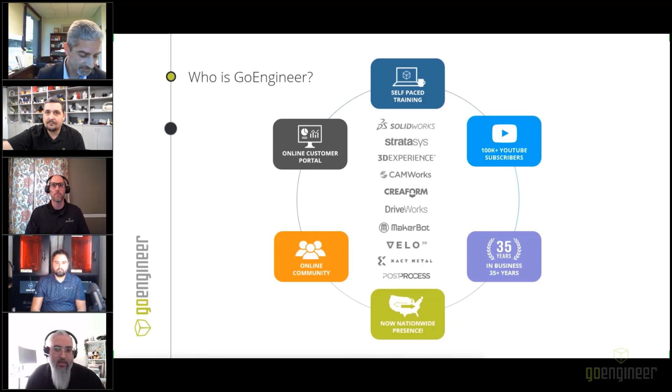GoEngineer is really coast to coast across Canada and the US. We have over 40 offices, 125 certified technicians, and for dental labs where production is your number one priority, we can be your edge against your competition.

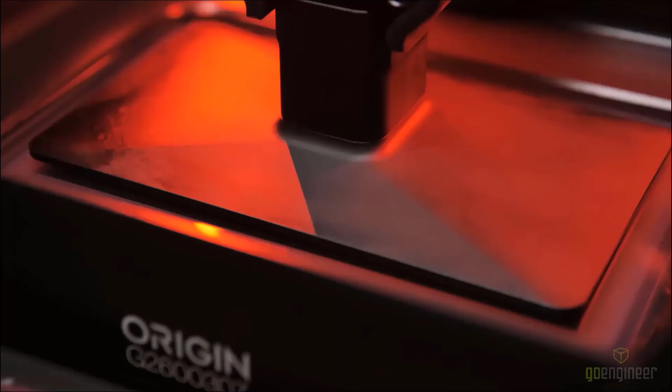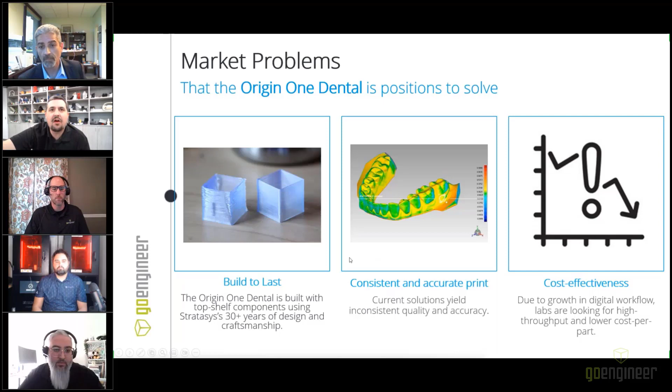Let's first look at this through the view of the problem statement and value propositions we're trying to approach with the Origin One Dental system. The market problems we look at today are that a lot of the systems out there typically aren't built with the same quality materials and components you'll find in a Stratasys machine. Stratasys has been leading the additive manufacturing industry in the quality of industrial 3D printers for over 30 years, and this continues with the Origin One Dental machine. We provide very consistent and accurate printing, and the goal is to have cost effectiveness not only with the machine, but with the cost per part in the dental models produced.

So what problems can the Origin One Dental help solve? Due to workflows and growth in digital workflows, labs are looking for a more cost-effective solution, and the Origin One Dental has quick print times paired with economical resins, resulting in low cost per part. Inexpensive DLP solutions produce a wood grain surface finish, like stepping in the layering. Origin One Dental has a proprietary separation process, which we'll talk about a little later, that results in a very smooth surface finish.

Inconsistent quality and accuracy with existing solutions is another issue. We have tightly controlled software which enables print processes to ensure high degrees of accuracy and part-to-part consistency. The software technology is static on a lot of the systems out there. Cloud-connected printers allow for software updates, which enables print performance improvements as you own the printer. Low-cost hardware is unreliable and not built for high-volume usage. Origin One Dental is built for industrial production with a footprint that maximizes the space.

Richard, if you could just stay on this slide real quick. These benefits we just went through, Trey is going to speak to in more detail and from a higher level of how these benefits are working through his lab. So really looking forward to hearing that from Trey.

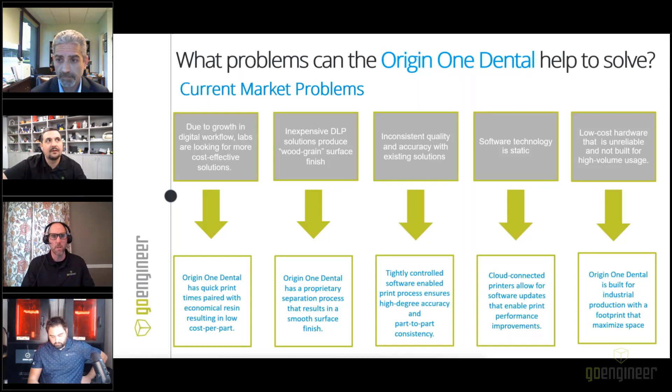Yeah, me too. Okay, so here's what the machine looks like, and you can also see it behind Trey there, a couple of them. The technology we're using is a variation on digital light processing that Stratasys refers to as programmable photopolymerization. The build volume is 7.5 by 4.25 by 14.5 inches. It's a relatively small machine compared to a lot of the other Stratasys machines on the market. You can get down to a layer thickness of approximately 25 microns. One of the nice things about this system too is that it runs on standard 110 or 220 power, nothing fancy.

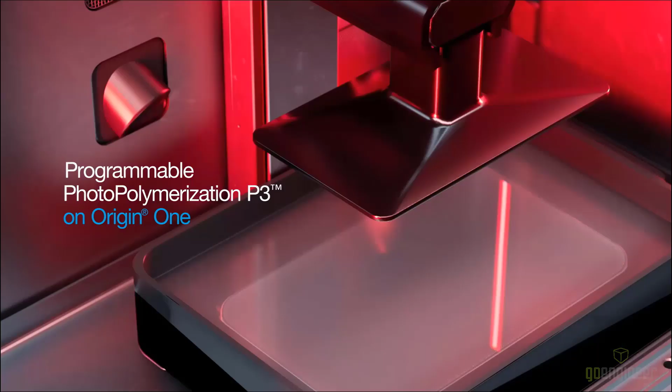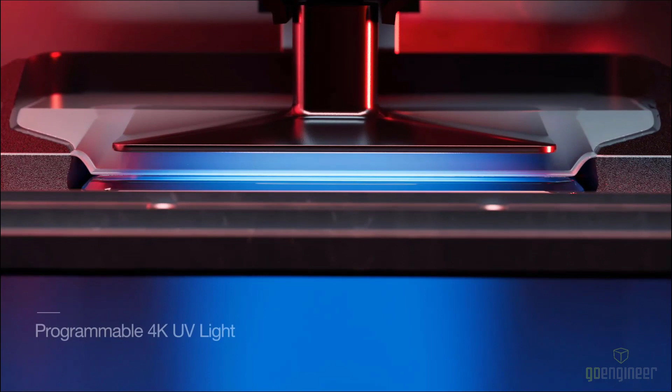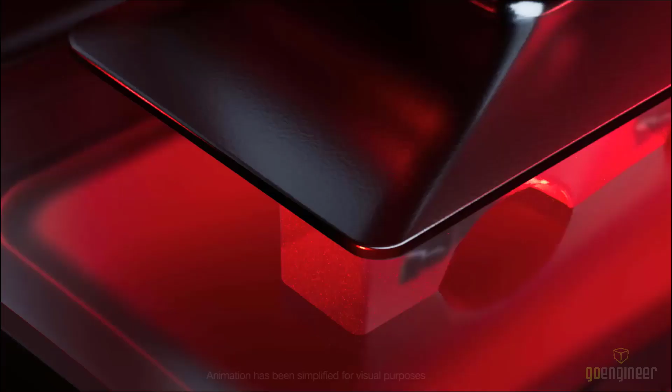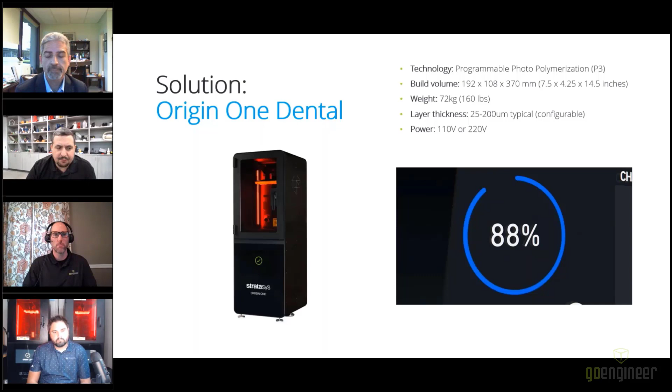And I want to show you right now the separation mechanism. The idea is that the Origin One uses a pneumatic separation mechanism. You can see that little baffle that lifted up, and that provides the ability to separate the printed model from the build sheet. In a lot of printers, that's an area that can lead to failed prints if it's not handled properly. So that is really one of the big benefits to the Origin One system.

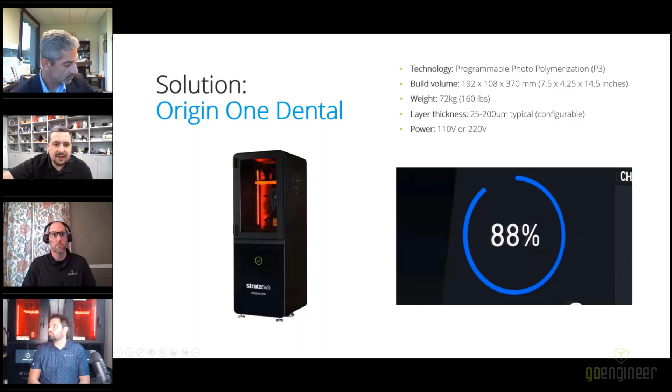So turn it back over to you. Yeah, so this is where we're going to pass it over to Ira. Again, thank you, Ira, for your support here, and really excited to have you chime in on this part of the webinar. We'd love to hear from you, share a little bit about Keystone Industries, your leading edge Keyprint 3D line of 3D resins, as well as how those resins have been integrated with the Origin One and your experiences with those.

Sure. First of all, thanks for having me today, Aaron, and the whole team, including at Stratasys, and I'm very pleased to be here and to be talking about the partnership. We've been working with the Origin One system for quite a while, even through the development of the Origin One's technology, as at the same time we were developing some of our Keyprint resins. So we've been in close touch with this printer and the folks behind it for a long period of time.

Hi, I'm Ira. I run the dental business here at Keystone.

Keystone is a manufacturing business focused primarily on two verticals, although we're in some other spaces. One is the dental space, which I'm the president of that group. And the other vertical is cosmetic nail coatings, particularly reactive nail coatings, dip powders, gel manicures. The secret between the two and why they work together is really polymer technology. While we're competent at a lot of different scientific methodologies and applications and materials, polymer chemistry is really at the very heart of what we do.

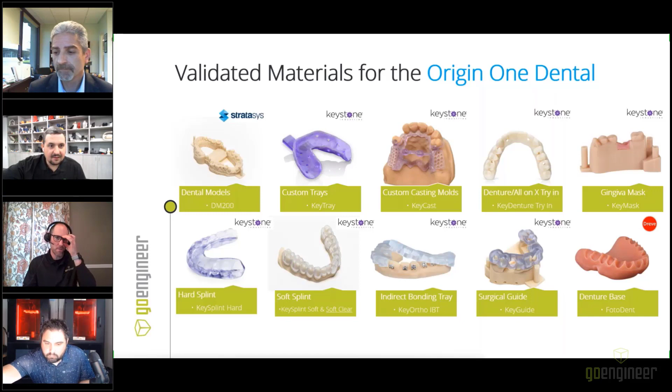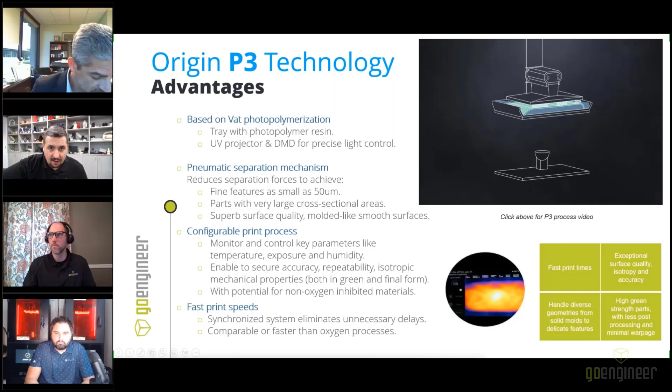Our print processes are totally configurable. You have control over all the parameters needed to validate materials on your own. We also have fast print speeds — significantly faster than what we see elsewhere on the market. If we look at the speed and number of parts the Origin One can create compared to its competitors, you can see the print time is significantly less, as well as, in some instances, the post-processing time.

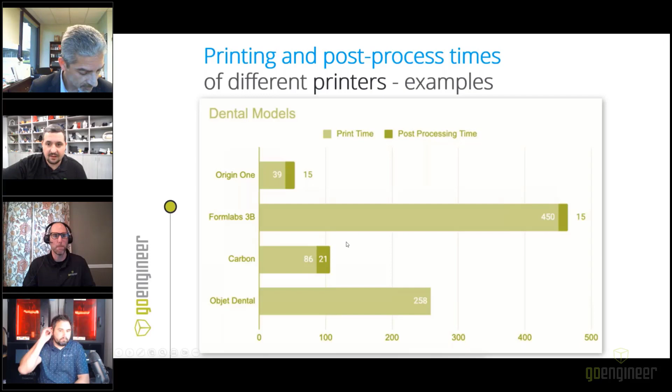With that, I'll quickly go through these slides and talk about some build trays and estimated print times possible on the Origin One Dental.

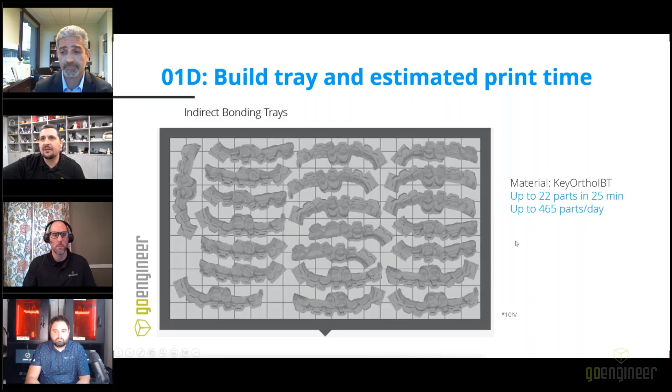Here we have a collection of indirect bonding trays, printed in Key Ortho IBT. We have up to 22 parts being printed in 25 minutes, which allows you to generate up to 465 parts per day.

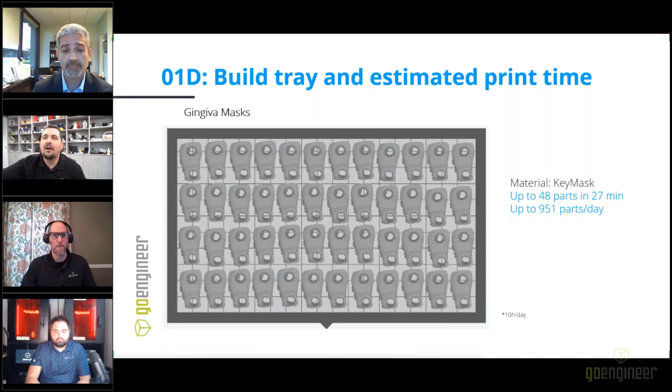Here we have some gingiva masks, with the material Key Mask. We have up to 48 parts in 27 minutes, up to 951 parts per day.

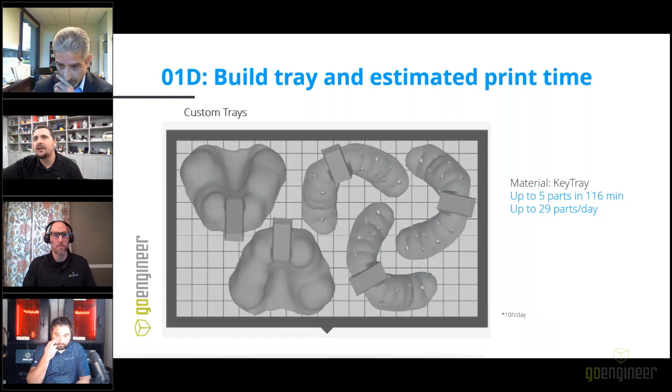We have some custom trays, with the material Key Tray. We have up to 5 parts in 116 minutes, with up to 29 parts per day.

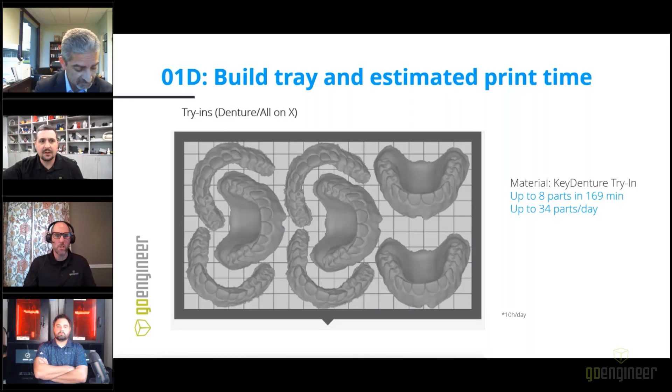RPD, print to cast. The material is Key Cast, with up to 8 parts in 37 minutes, up to 121 parts per day. And Richard, if we could just stay here, I did have one question for Ira on the castable, the Key Cast.

Historically, many of these resins, due to their makeup — I'm not a chemist, so I won't get into the nitty gritty — have primarily been indicated for RPDs for one reason or another. Some have issues with casting alloys or pressing lithium disilicates. Can you also use the Key Cast for those applications as well?

You can. It's been worked on and tested, whether it's cobalt or other metals regularly used for crowns, multi-unit prosthetics, or cast partial metals. It also presses well as a ceramic press material. Burnout is clean, whether you put it in the oven at max temp or let it ramp, with performance and no expansion of the resin into the surrounding investment material. So you get a really good, clean product from it. We've had really no complaints about how it's working, as designed, for what would traditionally be a wax-up.

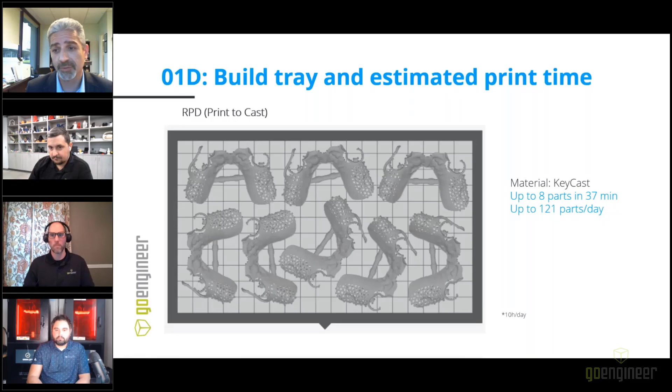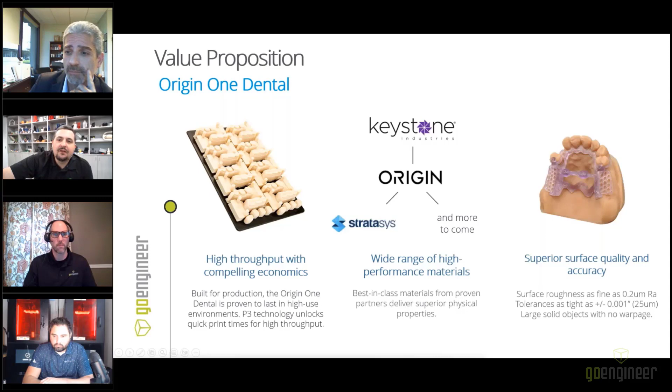The value proposition in the end for the Origin One Dental is that we have high throughput with compelling economics, a wide range of high performance materials from valued and trusted partners, industry leaders, and our machines can produce superior surface quality and accuracy. And with that, I'm going to be going to our next guest speaker.

Yeah, that's a perfect segue, Richard, for Trey to pitch in here. So Trey, again, thank you for joining, your support. I see two Origin Ones in the background there. Did you guys see the platforms raised up earlier? I did, it was super cool.

So Trey, here you are, owner, operator, Express Dental Lab. You have a couple Origin Ones behind you, you have other 3D printing technologies. Just kind of educate us. What were you considering when you were looking at the Origin One? What gravitated you to the system? And kind of how's it transformed Express Dental? How does it complement the other technologies that you have there?

So we started 3D printing here at the lab much before the Origin One was available to us, and we had worked with other DLP or SLA printers. And kind of the problem that we ran into as we began to scale and see more of the benefits of 3D printing models specifically for crown and bridge, we found that some of the smaller desktop printers just couldn't keep up, either from a production perspective, but from a failure rate. A lot of the other machines that we worked with, even though the print times were kind of long, the build platforms were a lot smaller.

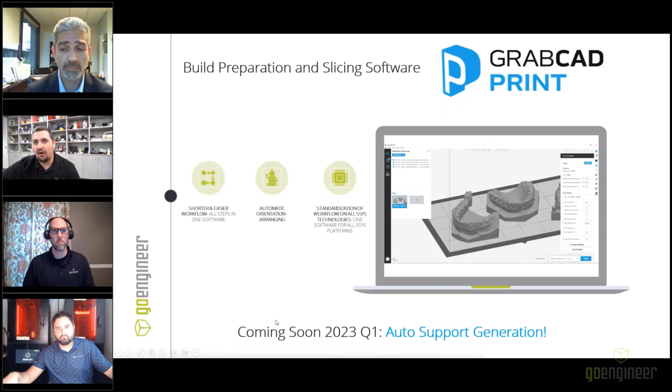And then finally, just real quick about the workflow: once the parts are removed from the printer, there's a very brief sonic IPA bath, and then we cure the parts in a validated curing unit.

So to that point, just real quick, Richard. At GoEngineer, we work with another company called Post Process Technologies, based out of Buffalo, New York. They partnered with Stratasys and Origin One to validate the resins to print, and I think you're also working with them on validating the resins post print, right? So just know they're good guys. So just know that we have a solution from Post Process Technologies.

It eliminates IPA, which is kind of dangerous with a 50 or 60 degree flash point. Their solution uses no IPA - it's a proprietary detergent that's non-combustible, non-flammable, and gives very consistent, clean parts. Especially for parts like an implant model, where a technician may otherwise need a Q-tip to get into small spaces. So just know that Keystone is working with post-process technologies, and I think probably real soon we'll have a green light that all of their resins are validated through their system. That's a solution coming down the pipe, and if you want more information, I'd be happy to share it. I wanted to bring up that there's another way of cleaning that's safer, with 7 to 10 times longer longevity than IPA, so you're not getting saturation as quickly, and more consistent, cleaner parts - particularly good for high throughput labs.

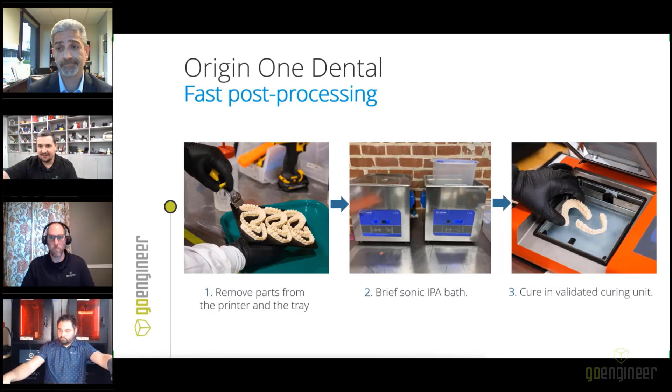Okay, so lastly, I just wanted to talk about some accessories that are upcoming.

There's a ProAero extraction system, which you've seen on some other Stratasys products - it's an air purifier. There's also the resin pour jig. I'm very excited for that because it's really easy to switch the vats on this machine, you just pop it out, but sometimes you have to empty the resin still in the vat back into the bottle - which is nice about the Origin One since you can't do that with all DLP systems if they have a 2-part resin that's not on the table. So this allows you to pour that very easily.

The printer stand seems like kind of a silly thing to have, but you need it to sit somewhere. The size of the machine makes it so some people don't want it on a table because it's too tall. So this is a very ergonomic solution.

And then finally, the tray cover that you can put on top of the tray Trey is holding there. That way you can seal off the resin from the air around it, which helps it stay clean with no dust or debris getting in, and the light stays out to keep it from curing.

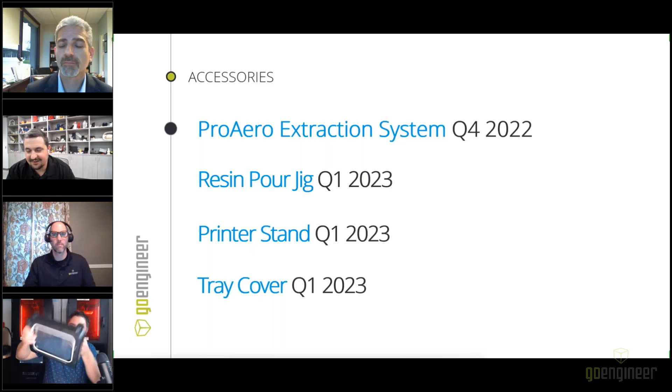What I like about their trays is that it's solid, so it's somewhat elevated off the surface. If you set it down somewhere, you don't have to worry about scratching or messing up the membrane. We replace that membrane every week here - it's kind of thin, sounds like a drum, almost like a drum head. But that's what the tanks look like, and they're pretty easy to hold, move, and set down.

Awesome. Hey, thanks for showing that.